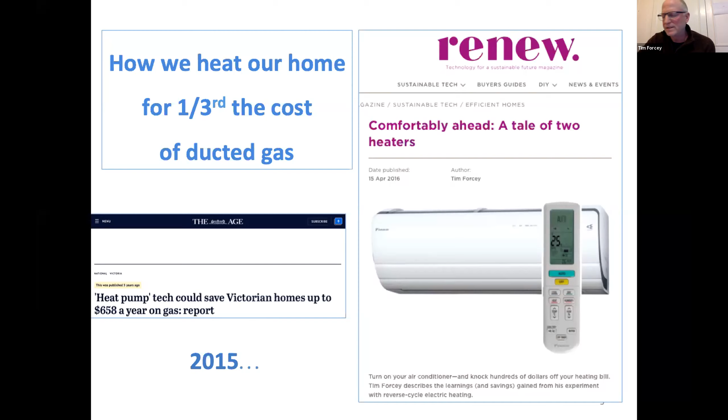That just goes to show that this is a way Victorians and other Australians can start to save hundreds of millions, even billions of dollars a year, as we move to technologies that don't involve burning fossil gas. Our home story was documented in that article from Renew magazine, about comfortably ahead, a tale of two heaters.

So this is how it works. Your reverse cycle air conditioner is an air source heat pump, and I'll go into that in more detail. Basically, it can suck heat out of the air outside your house. Even if it's 2 degrees outside, there's still heat in the air. We don't need to worry about running out of heat in the air unless it were like minus 250, at absolute zero, on the surface of Pluto.

But fortunately, on our planet there will always be heat in the air. With a correctly organized refrigerant system, you can suck heat out of the air, and then the refrigerant goes through a compressor, gets hot, and that's hot enough to heat your house. So basically the sun puts heat into our air, so these air source heat pumps are another form of solar energy, really, that you don't even have to put on your roof. They suck heat out of the air and you can heat your house with that.

And if it so happens that the sun's shining and you have solar panels to drive the compressor in that refrigerant system, well then that's certainly 100% renewable. Or if you're buying green energy off the grid, it's 100% renewable. So that's how that all works. For every 1 unit of electricity you might need in a reverse cycle air conditioner to drive the fans and compressors, you might get 4 or 5 units, or maybe even 6 units of heat coming out of the thing. That's why it's so cost effective now and can beat gas.

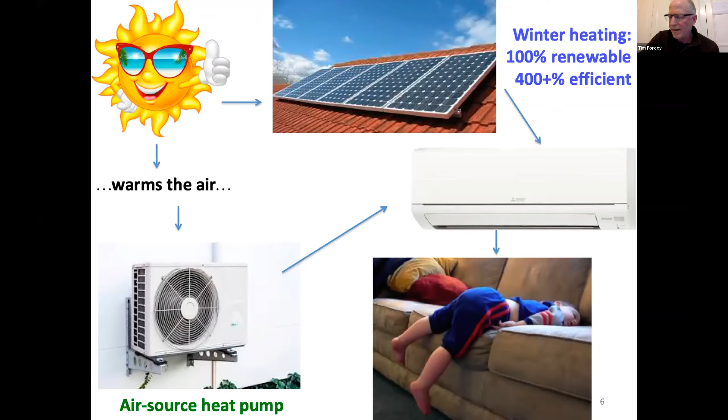So I'll just go through what is a heat pump briefly, because really this is the advantage of the gas industry. Humans have been pretty used to burning things for a long time, and we understand that if you burn something more, it could make you warm. So that's the gas industry's major selling point, that they have a flame, you could set fire to it, and therefore you'll be warm. But when I try to describe to people how heat pumps can get renewable heat out of the thin air outside your house and pump it up to a temperature warm enough to warm you up, it is very confusing for people.

So what is a heat pump? Well, that shows a sketch of it, but that's a little bit too complicated. I'll go to the next one. Here's another heat pump you're familiar with - it's called a refrigerator.

Basically, a heat pump pushes heat in the direction opposite to the way it would naturally like to go. Same as a water pump. If you were halfway up a hill and you had a water pump and you wanted to pump the water up the hill, you'd need a pump to do that, because otherwise the water would naturally like to flow downhill. Well, heat is also a thing, and the heat would like to get from your warm kitchen into your fridge and spoil all your food.

So they invented the refrigerator, which was the first heat pump, to turn that heat around the opposite direction and send it back out into your kitchen again, away from your food. And it takes a refrigerant system to do that.

So you've got an expansion valve. The refrigerant goes through the expansion valve, gets really cold. Now it can suck the heat out of the food. Then the refrigerant cycles around, goes through the compressor. Now it's hot enough that it can go through another heat exchanger and transfer that heat from your food out into your kitchen. So that was a heat pump, and they said, well, that was really a good thing.

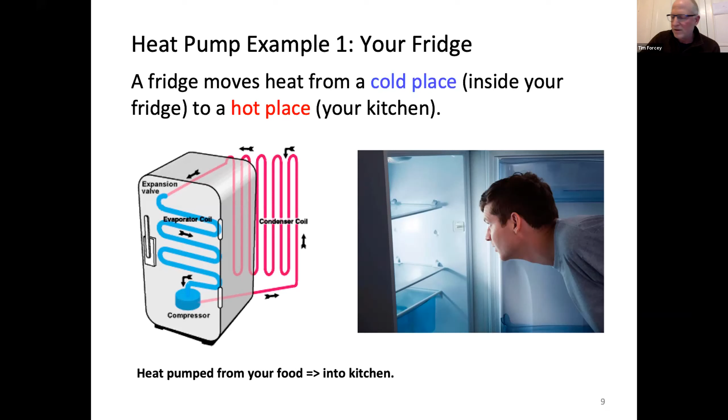Tell you what, maybe we could use the same technology to cool a whole room. Let's try that. And so they invented that, and that was called air conditioning.

So we have a heat pump that's able to, the refrigerant gets very cold, goes into your lounge room on a hot summer day, sucks the heat out of your lounge room, goes outside, goes through the compressor, gets even hotter. So now we can reject all that heat into the outside, and that's called an air conditioner in the summertime. It's pumping heat out of your lounge room.

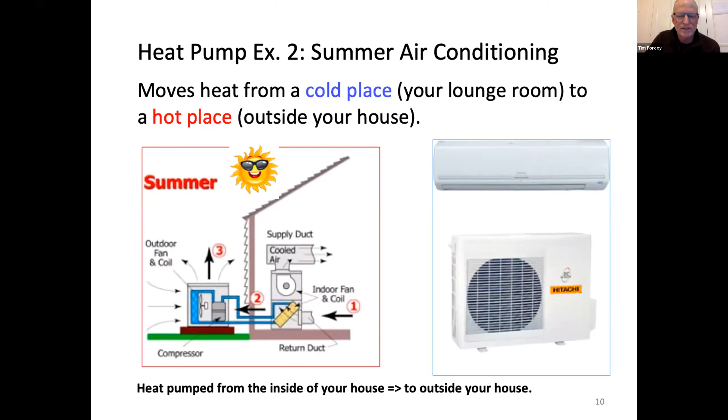But then somebody really smart, it was probably a German, I suppose, said, well, what if we can run that around backwards? Maybe we can actually bring heat into a house. And that's exactly what the reverse cycle air conditioner does.

In this case, on a cold winter morning, the refrigerant goes through the expansion valve, gets really, really cold, goes into the heat exchanger outside, sucks heat out of the air, then the refrigerant goes through the compressor and gets hot enough to heat your house.

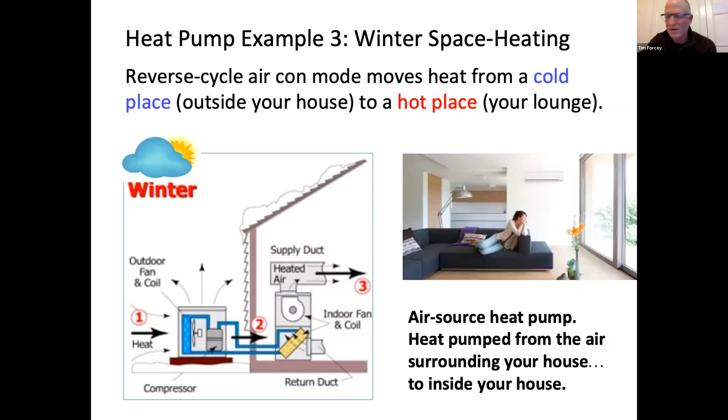So if you want to really convince yourself of this, turn on your reverse cycle air conditioner in heat mode and go outside and stand next to it, and you will just feel all this cold air blowing around, and you'll start to get the idea that this thing has sucked heat out of the air. And then that heat goes into your lounge room and can very cost effectively heat your living spaces.

And you can also do this for water as well. In this part of the world, we do refer to these hot water systems as heat pump hot water systems, but it's basically a reverse cycle air conditioner that can heat water. So in this case, the refrigerant can get so hot that it is able to heat your water. And again, most of the heat that it is using to heat the water is not the electricity, it's the renewable heat that it was able to suck out of the air outside your house.

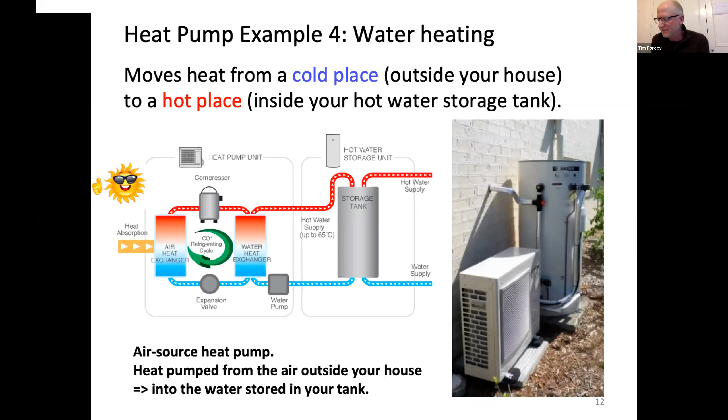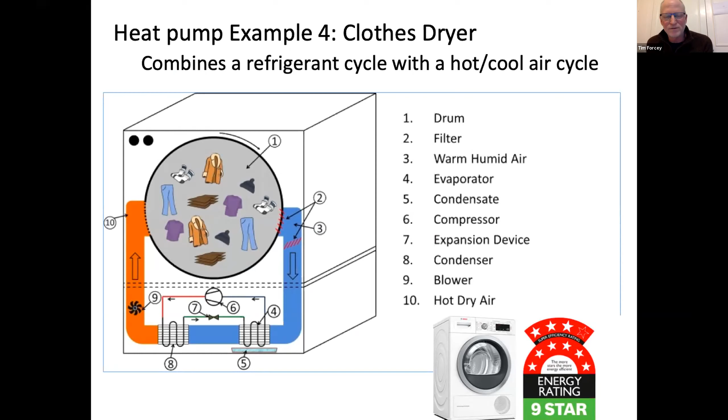I'll confuse you a little bit here and say, these days we even have heat pump clothes dryers. Now, these things really have nothing to do with renewable energy, although the electricity you put into them could be renewable. But basically, it's just a really efficient clothes dryer using a refrigerant system. And it's just so efficient, and it doesn't waste any heat, that we now have these things up to like 9 stars for these heat pump dryers. But that's a bit of a distraction.

Let me go back to the hot water system. And what we see here, I'm trying to explain it. I'm saying with this hot water system, one part of electrical energy can give you 4 parts of hot water. How does it do that? Well, it is able to get 3 parts of free renewable heat from the air, which, like I said, is basically solar energy, because why does our air have any heat in it?

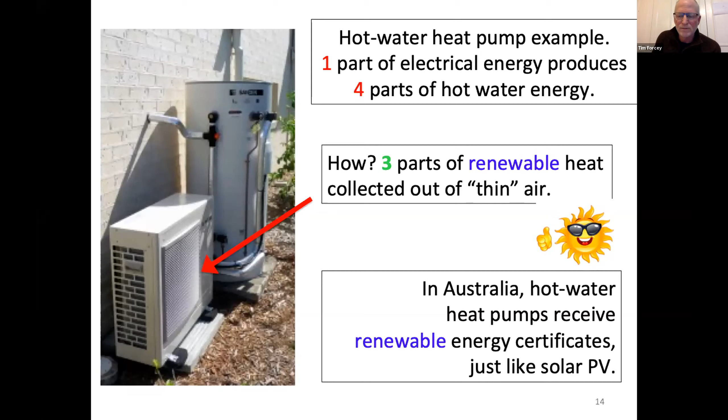Because of the sun. And so this is a way to suck heat out of the air, another form of solar energy that you don't even have to put on your roof. And even the Australian government recognizes this as being a form of renewable energy, because when you buy a hot water heat pump, the cost will be reduced because you get renewable energy certificates, just as if you had bought a solar PV system. So this is what it looks like out the back of my house right at the moment.

It might not be that attractive, but I call it the underbelly of the electric home, because you can see the 3 heat pumps lined up there, one at either end. That's for heating and cooling either end of the house, and then the hot water system in the middle.

This is another article you can find on the internet. So that's how we can heat our homes and heat our water very cost effectively, at a fraction of the cost of burning gas. So that's really important.

I call this economic fuel switching. Someday you'll all have electric cars, and you will have fuel switched from petrol to electricity. Here at home, this is the opportunity to fuel switch away from gas and on to basically renewable heat. So that's the fuel switching we need to do.

But the other thing to think about in your home is, don't forget about your thermal envelope. The draught sealing, the insulation, all of those things are very important as well, because that's another way we can knock out gas.

If you crawl up into your roof space and find that the NBN person went up there and threw all your insulation off to the side, well, if you put that back, you can help reduce gas use if you're still burning gas at home. And it's also going to make the job easier for your reverse cycle air conditioner, if that's the situation you'll be heating with. Same thing with draft proofing.

Our homes are just so incredibly leaky, as we know, and it's time to tighten those up. One of the reasons our homes used to be leaky is because we were afraid our gas heaters would poison us. So if we're getting rid of the gas heating, we can also tighten up our homes a lot more than they are now.

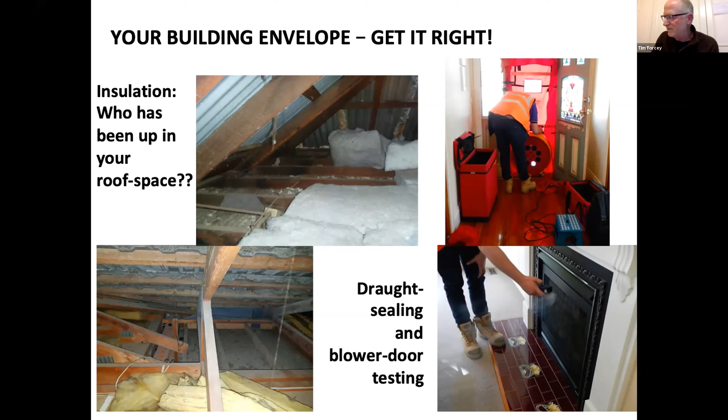So this was the sort of messages that I published out of Melbourne Uni in 2015 and did in my own house. But so who else is saying this? That this is the sort of way we can save money?

And so they're excellent. In 2018, they published a study where they looked at every different combination of house in every different part of Australia and worked out just how much money people could save. Of course, the cheapest thing is if you, by some miracle, already installed a reverse cycle air conditioner — you can start tonight with the heat button and start saving money instantly.

But in other cases, you might have to spend money to save money, which means you might need to install a reverse cycle air conditioner, or convert your gas hot water service over to a heat pump, or change the cooking from gas to electric induction. So there can be money to be spent, of course, to save money. And this study looked at all those possible combinations.

So there we go. We had Renew publishing this study, and they got some press in the Herald Sun and everything. So that was fantastic.

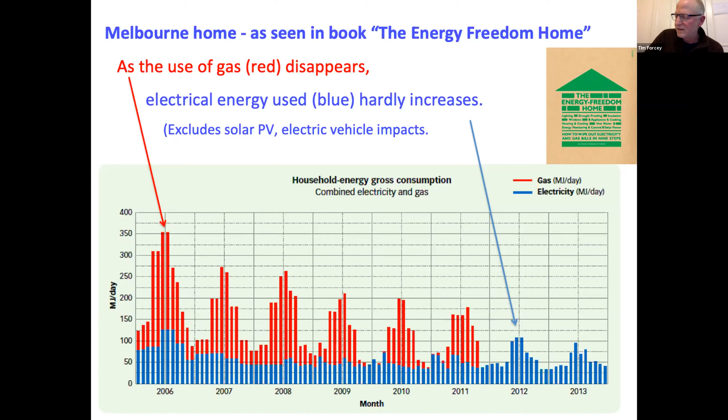But it's also a challenging place because they do get fairly cold there. So it's been good to see that all the things we talk about doing for Melbourne homes, they're doing them successfully in Canberra. So if they work in Canberra, they're going to work down here.

So your standard resistive electric heaters, they are fair dinkum electric. It's 1 unit of electricity gives you 1 unit of heat, like a toaster. And that's why they're so expensive to use. Resistive electric heaters are not heat pumps.

They do not get free heat out of the air, and that's why you see $1,100, whereas down the bottom, only $200 for an efficient reverse cycle air conditioner. That's the leveraging you're getting by using a heat pump. For only $200, you can get all the heat that would have cost $1,100 if you tried to use the other type of electric heating.

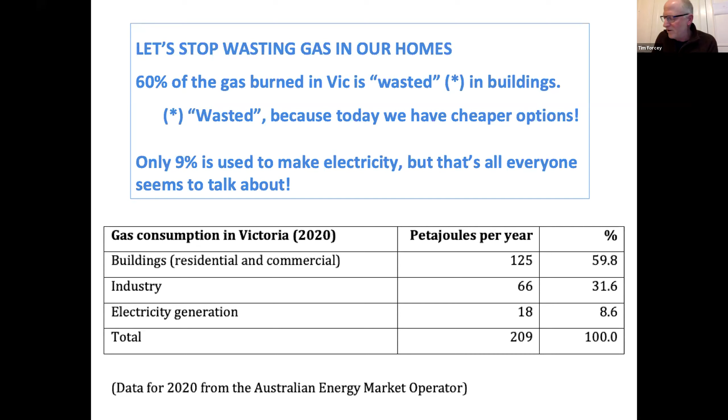And guess what? If you thought you wanted more gas for industry or for electricity, well, here you go. Here's 125 petajoules. Have it. Do with it what you want. We suddenly found all this gas in all the suburbs of Melbourne. We didn't have to go and frack the Otways or anything. So it is a significant amount of gas.

One of the main things is to inform Victorians, both householders and trades, who just don't know about any of this. This is all a very big secret, and the gas industry would love to keep it a secret, except for AGL with those strange web pages they created. They're the only ones that have broken ranks. But you have all these advertisements by other gas companies on SEN, et cetera, on the radio, saying how gas is the cleanest, greenest, nicest looking thing you ever wanted to have in your house. And a lot of the plumbers and others believe that as well, and a lot of householders. So obviously there is a disinformation campaign going on, and yet there's very little in the way of an information campaign other than, you know, My Efficient Electric Home.

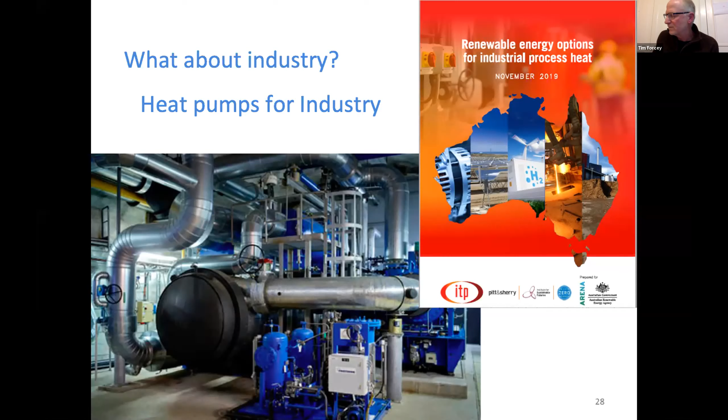So fortunately, a lot of food industries, wineries, abattoirs, et cetera, around Australia are getting into industrial scale heat pumps. But for them also, gas used to be cheap, so they would just use the gas, get a cheap gas boiler to heat your water, boil your water. You can do these things with heat pumps as well. So there are a lot of opportunities for industry to operate more efficiently, or also tap into renewable heat. Lots of opportunities for industry, which I won't get into more tonight.

But just to fill you in a little bit - go back 20 years, gas was the cheap way to heat your home. We did it in this house with the old ducted gas heating, but now it's the air conditioners that are the way to go. So what changed? Well, air conditioners have gotten a lot more efficient, and I could talk about that separately, but also gas got a lot more expensive.

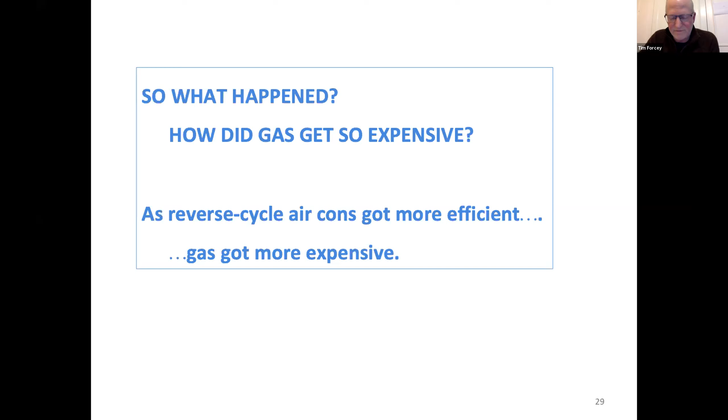It used to be that Esso and BHP were interested in producing oil out of the Bass Strait, and gas was just a cheap byproduct. They were pretty happy to give it away, just get it out of the way because it was getting in the way of the oil production. So everybody was happy with cheap gas. Then later on, the executives from Exxon would come over from Texas and say, you're giving this gas away, can't you charge more? And they're like, well, we tried, but it's a buyer's market, so we couldn't get any more for the gas.

Well, that all changed when the coal seam gas industry started up in Queensland, and they decided they could get all this gas out of the coal seams. And what were they going to do with it? The local domestic market wasn't big enough to take it. So they said, well, we'll export it all.

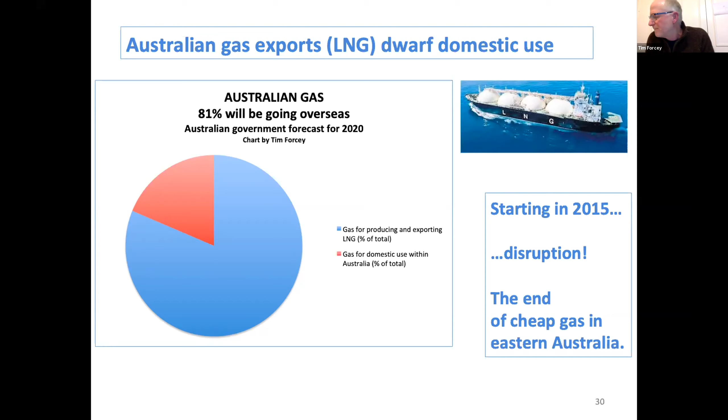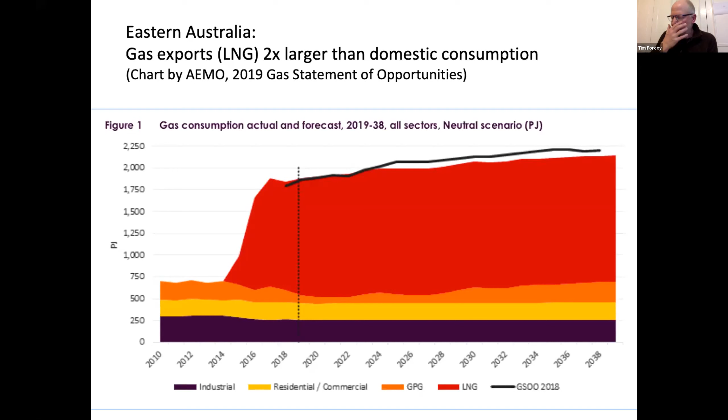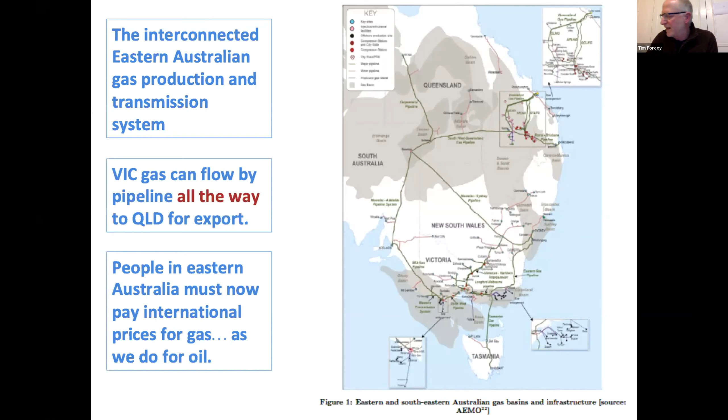There's still a decade or more of gas. These charts don't go out to 2030 — we'd like to see those too, but they haven't been published. But Esso's down to producing the dregs of the bunch, Kipper and Turrum, and they have high naturally occurring carbon dioxide in them. That's another greenhouse gas, but they can't send that down the pipe to your kitchen, so they've got to take it out and vent it into the atmosphere.

Of 1 million tons a year of carbon dioxide they have to take out of the Kipper and Turrum gas, they built a special plant for that at a cost of a few billion dollars. It's called the gas conditioning plant down at Longford. So in the future, 2025, they're only going to be able to produce gas out of Kipper and Turrum at the rate they can fit through that gas conditioning plant.

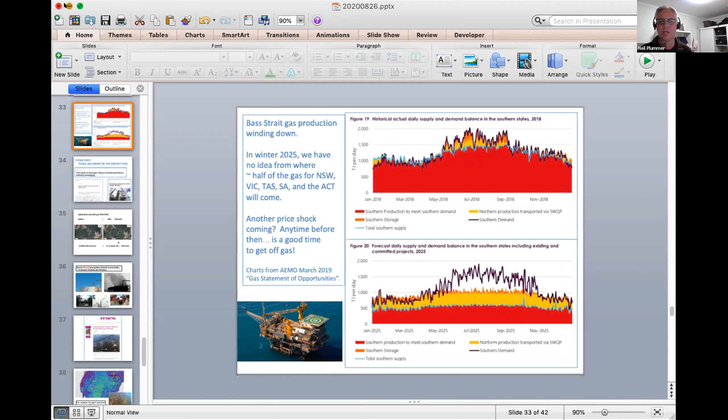That was excellent, and I've been following some of your videos on YouTube and your papers — terrific stuff.

Okay, how about I just read out two of the early questions that we got. The first one was from Phil. Phil says, I have questions about the temporal gap between the end of profitable gas and the emergence of dispatchable 24/7 renewable energy at a scale large enough to run an economy that looks even remotely like the one we're used to. Is anyone examining this question?

Are you okay to respond to that, Tim? So that's talking about electricity, right? Yes, it's about all forms of primary energy.

So is anybody looking at it? Yeah, gazillions of people are looking at the electricity side, for sure.

And, you know, in terms of gas, we waste a lot of gas in buildings. We need to stop doing that. And if you want to use that gas for other stuff, there you go.

Thanks, Tim. That's the part that's not being talked about. You could call it the demand side of gas. You know, in the old days with electricity, it was just supply, supply, supply, because they thought electricity demand would just keep growing. So let's just keep supplying electricity. And it's only in more recent times they said, well, hang on, maybe we could do things like not run pool pumps during the hottest part of a heat wave, et cetera. And so they started to look at the demand side for electricity. We need also to be looking at what we're doing with respect to gas demand. And if anybody did that, you'd quickly see all these opportunities and you'd say, wow, we don't need to be using all these fossil fuels we thought we did.